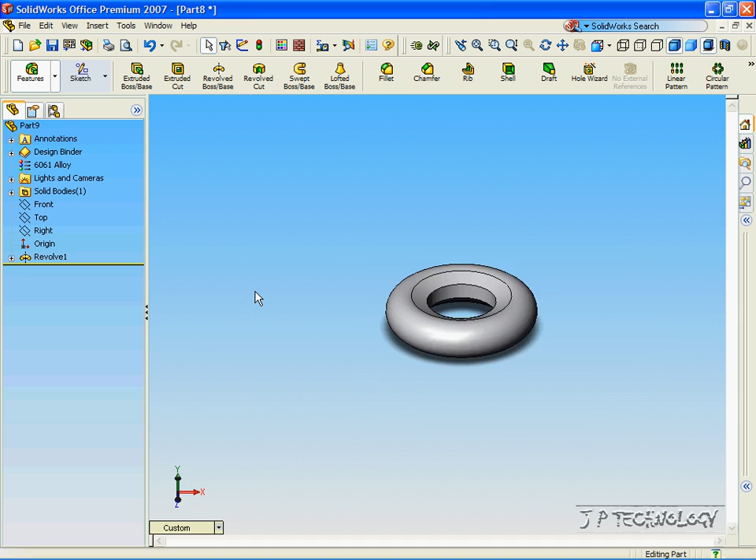This is tutorial number 5, and it covers Revolved Cut within Solidworks. Now, the parts that we made in tutorial number 4, we're going to use in tutorial number 5, and we're going to cut them. Now, press Control Tab, and you can flip through the parts that we just made from before. Now let's go to the pulley wheel, and let's click Front View,

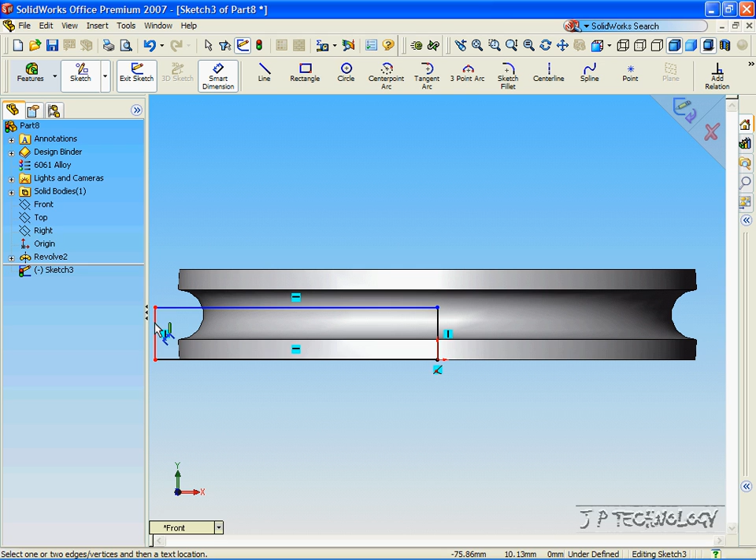and click the front plane, and let's click Sketch, Rectangle, and from the origin, click it and go out until you're totally outside of the pulley. Click there. Now click the Smart Dimensioning tool and click the top line and the bottom line, and we can make the height. And for this, let's make it 10 millimeters. Click OK.

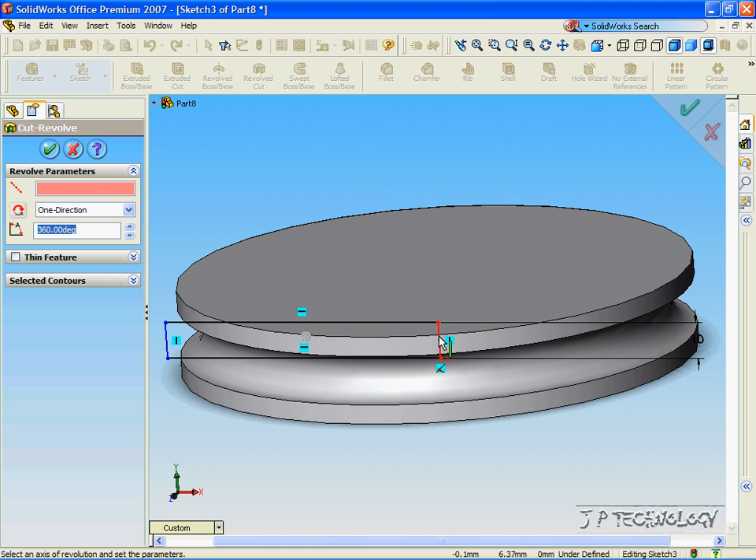Now click Feature, click Revolved Cut, and just like how we did before with the pulley, the axis of revolution is going to be that line inside there. Now click that, and we can see where the revolved cut's going to go around. Now it's going to go totally around, and it's going to cut what we want. Now click OK, and we revolve cut the bottom of the pulley wheel there.

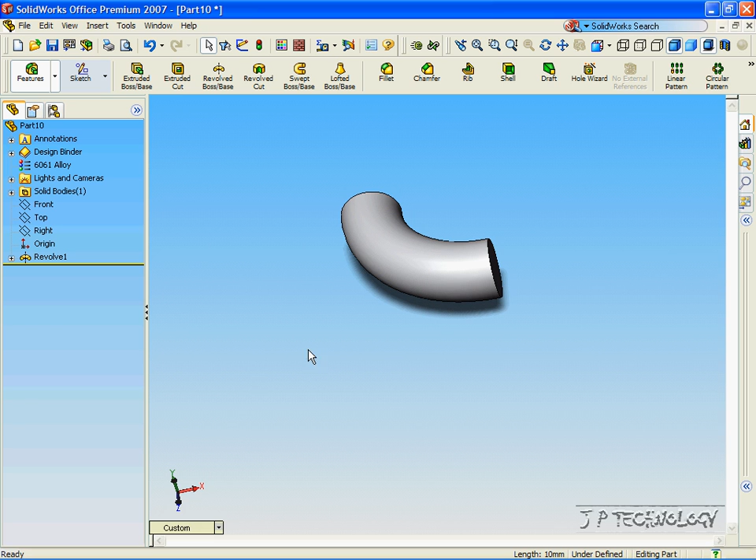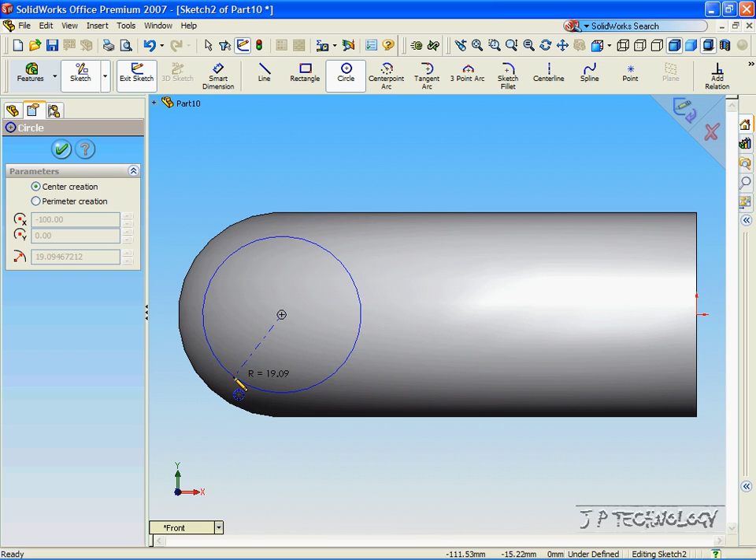Now press Control Tab, and now we're at the 90-degree bend. Now click Front View, click Front Plane, and click Sketch, click Circle, and move it onto the outside until you can see the circle that we made from before. Now click the dead center of that circle, and click there, and let's make it 20 millimeters. Click Enter, click OK. Now click Isometric View.

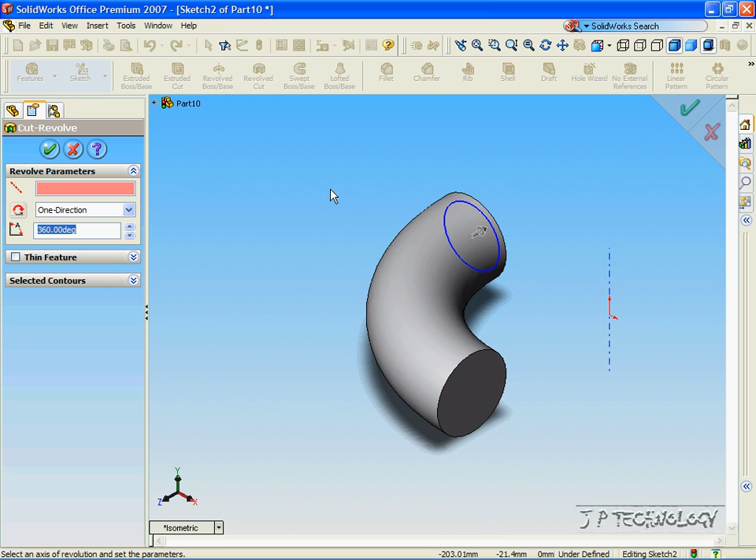Now, instead of drawing a temporary axis in like we did before, all we have to do is click View, click Temporary Axis, and we can see a temporary axis that's made with that circle. Now click Features, Revolved Cut, and click that temporary axis that we just put in. And with this, you can switch directions just like the extruding cuts. And let's make it 90 degrees again, just because that's all that we have.

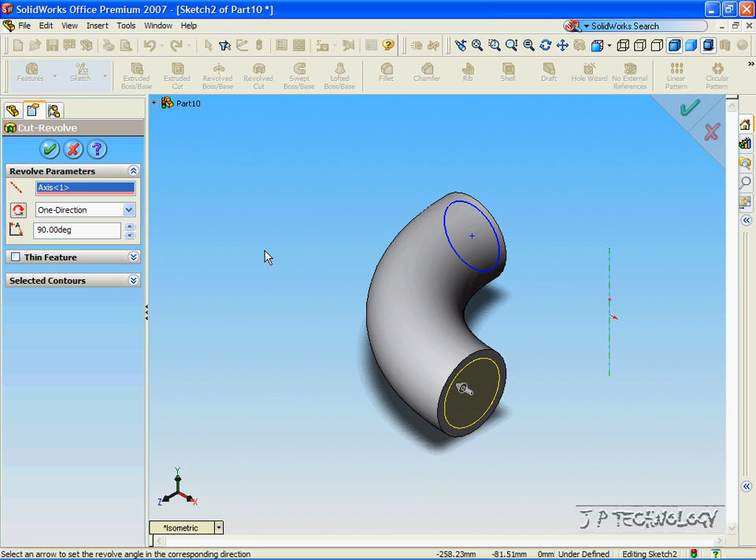And when you flip it, you can see it flips both ways. And that's the way we want it going. Now click OK, and we've cut all the way through it. So now our 90-degree bend is an actual pipe, and there's a hole through it. Now with this, there's also an easier way to do it. Go into Isometric View.

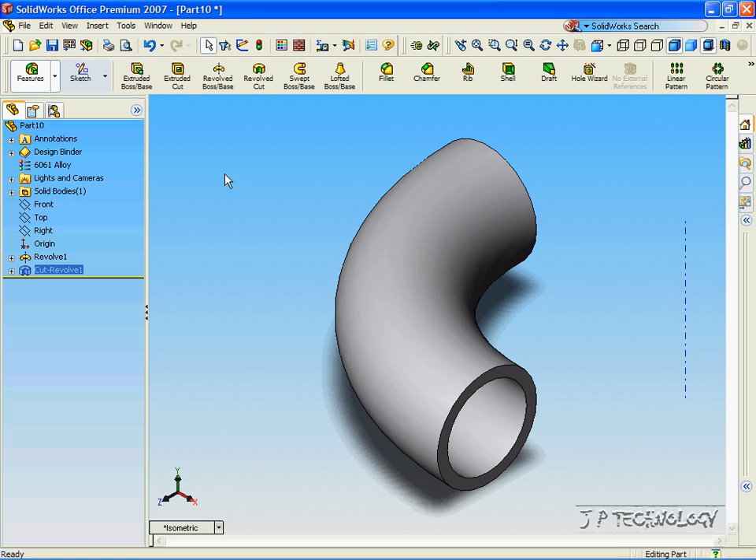Instead of doing a revolved cut from the revolved base that we already made, we can actually just make it from one revolved base. And I'll show you how to do that right now. Click Front, click Front Plane. Now zoom out a bit. Click Sketch, click Circle. In line with the origin, make one circle, and make one circle inside of it. Click OK. Zoom out a bit more.

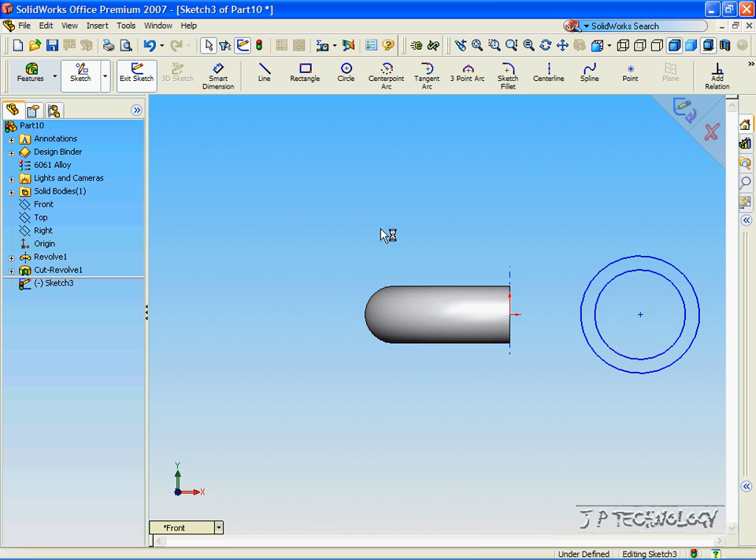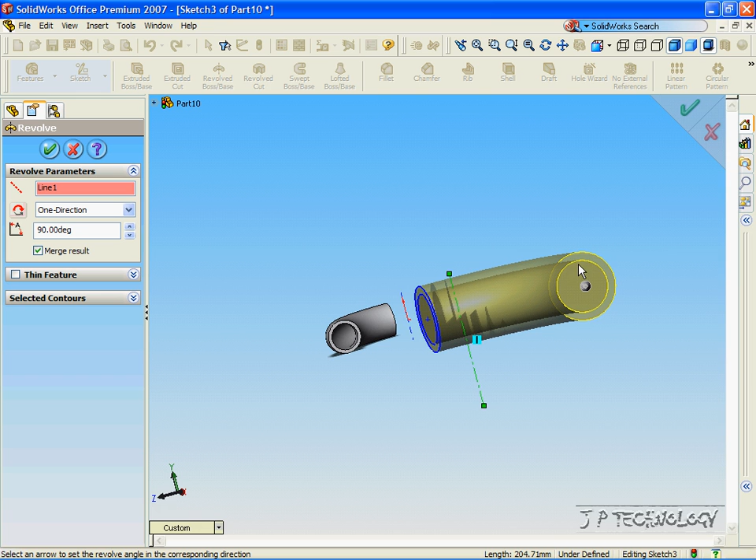And let's make a temporary axis to the side of that. Click Feature, click Revolve Base, and let's show the 90 degrees. And this time it's not going to do the big circle. It's going to do what's in between the big circle and the small circle. Now click OK, and we've made a thin-walled circle.

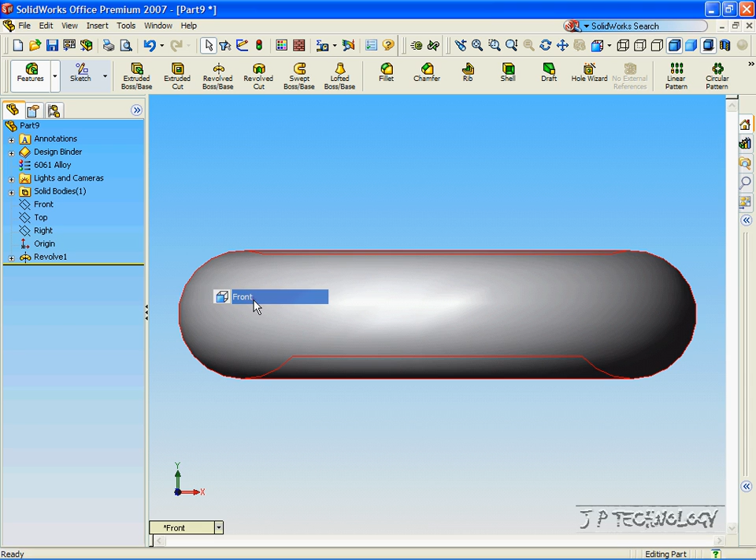Okay. Now click Control Tab, and we'll go to the donut. Now click Front, click the front plane, and just like we made a sketch of whatever we wanted before, let's draw another sketch of just whatever on the side, just a design that we're going to cut into this circle. Okay, click OK,

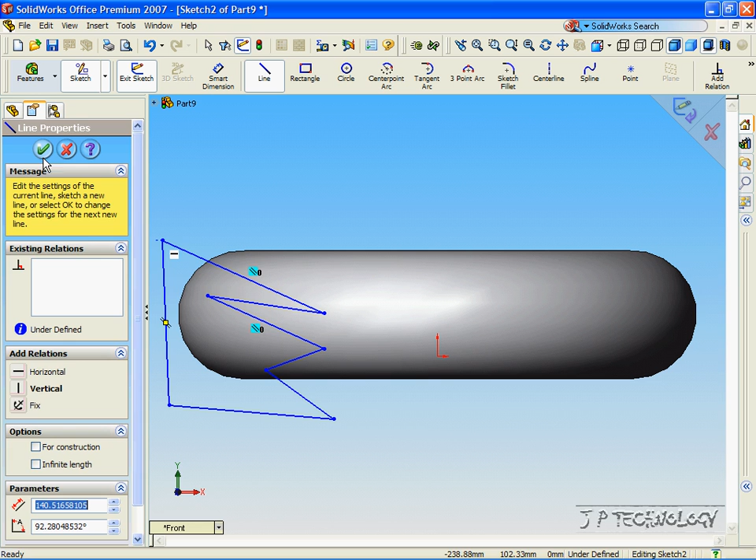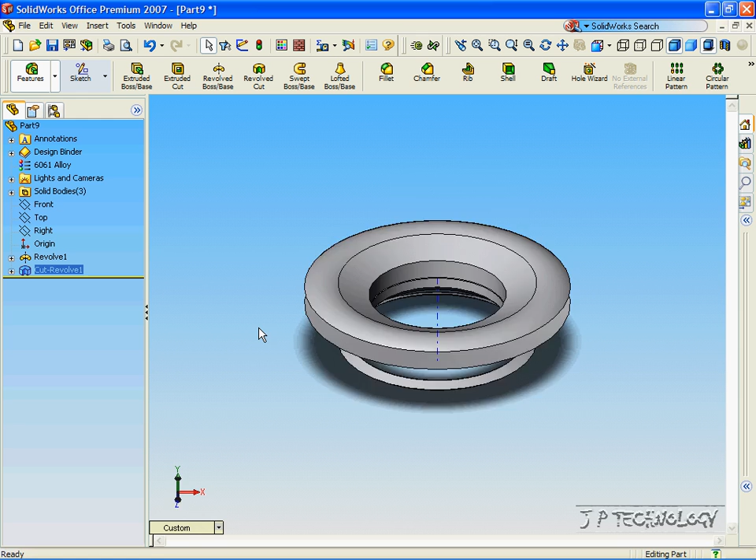click Feature, click Revolve Cut, and once again, view temporary axis and click it because we're going to revolve around that. It shows us the preview. Now click OK. Click all bodies, OK. And we've cut into the donut that we made from before. And this concludes tutorial number 5.